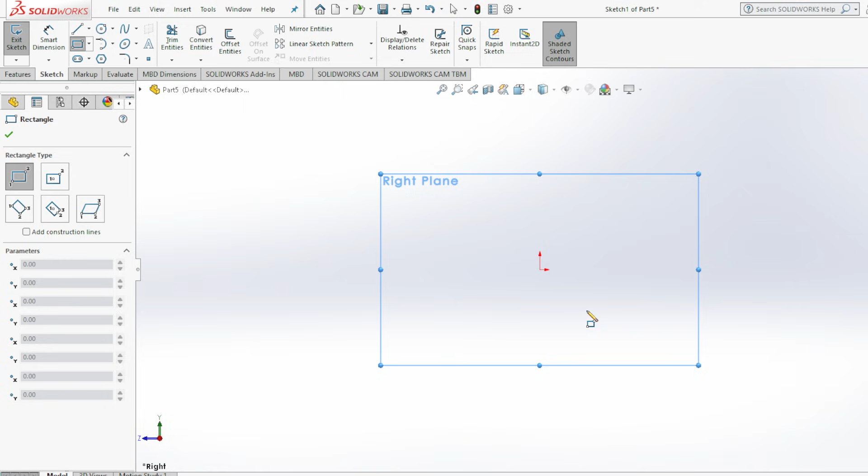Let's begin with the base. The shape of the base is visible in the right side view, which is the right plane, so we must begin this drawing there. Let's begin a new part, select right plane, select a rectangle, and draw a rectangle.

If you observe this, the size of the rectangle is 60 by 60. Go to smart dimension and make it 60 by 60.

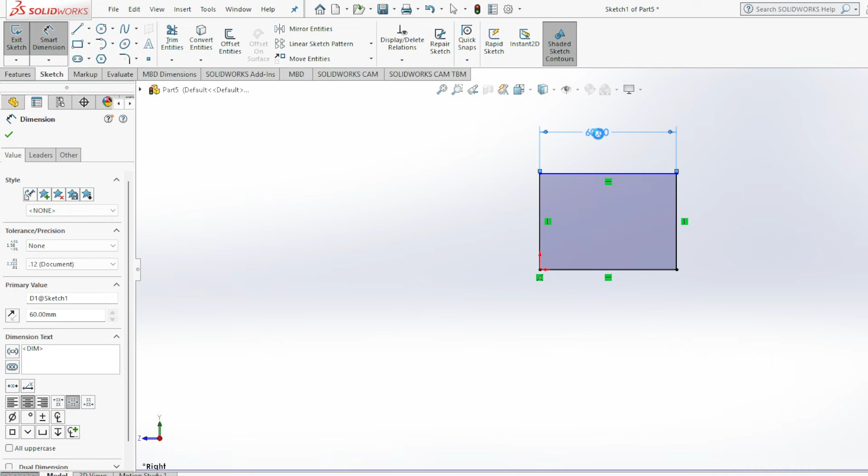Also we need two axes, horizontal and vertical. Go to center line, from the midpoint to the opposite midpoint, place a line, escape. Again select center line, from this midpoint to another midpoint, escape.

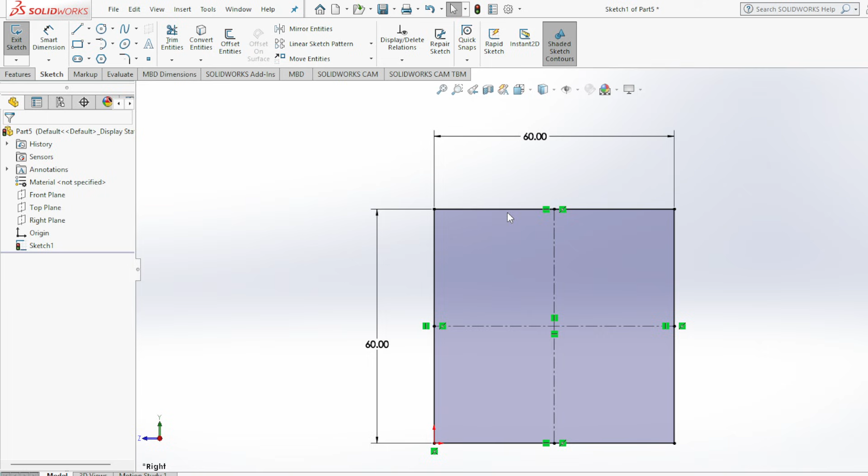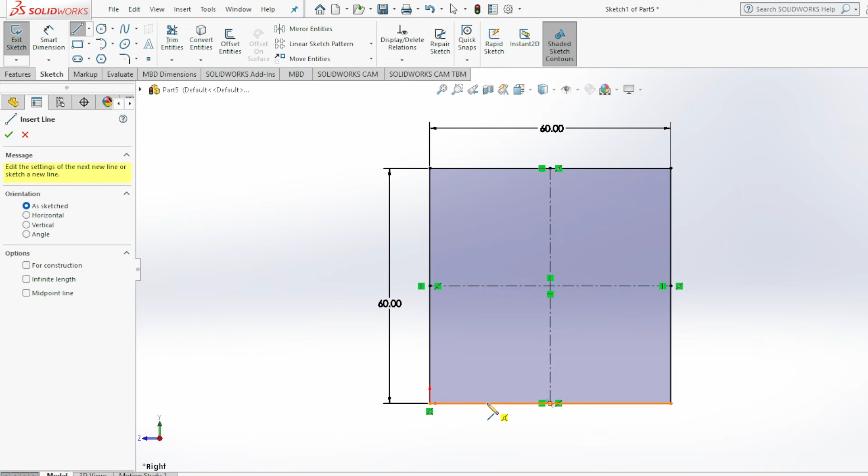Now we need this shape. The distance between this point and this point is 40, and the included angle here is 80 degrees. Select a line, draw an inclined line, then go horizontal, and again an inclined line, escape.

Now we don't need the area inside this shape. Go to trim entities, trim this portion, then OK.

The distance between these two points is 40 and the height is 20. Go to smart dimension, from this point to this point it is 40, and the height from this line to this line is 20.

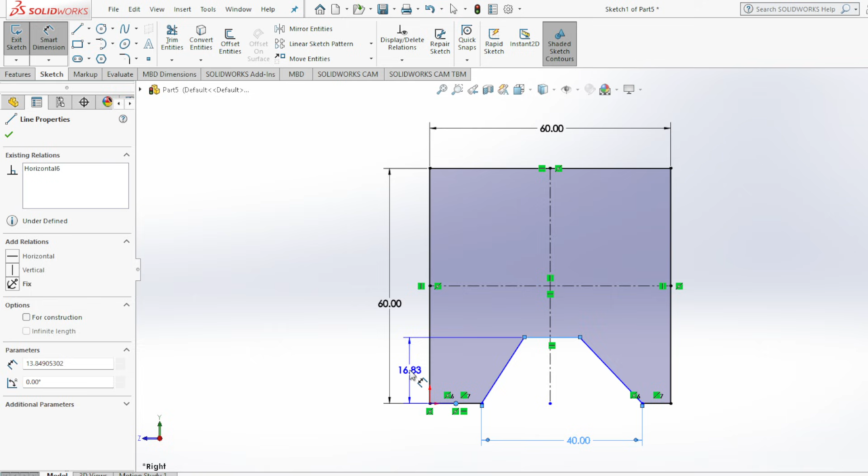Now we forgot the included angle. The included angle is 80. So click this line and this line and make this 80.

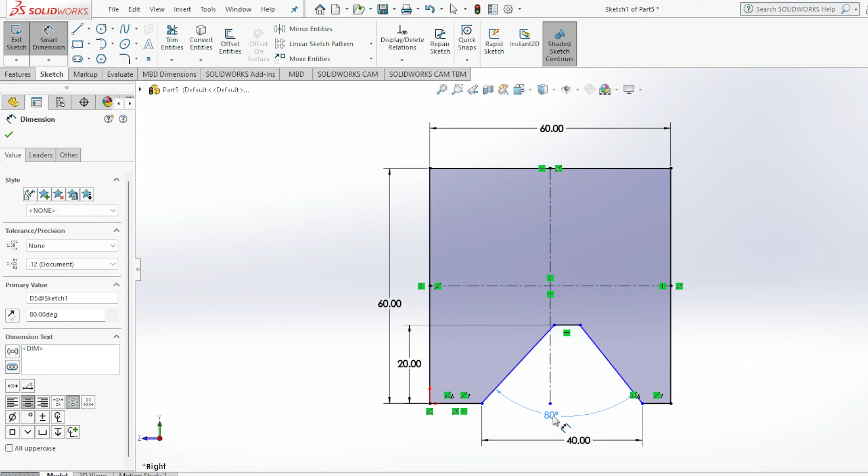If you observe this, the shape is distorted, so we must make this symmetric through the vertical axis. Simply hold control, click this line, click this axis, and also click this line. First, second, third. Hold control and select these three lines and make it symmetric. Then OK, so now it is fully defined.

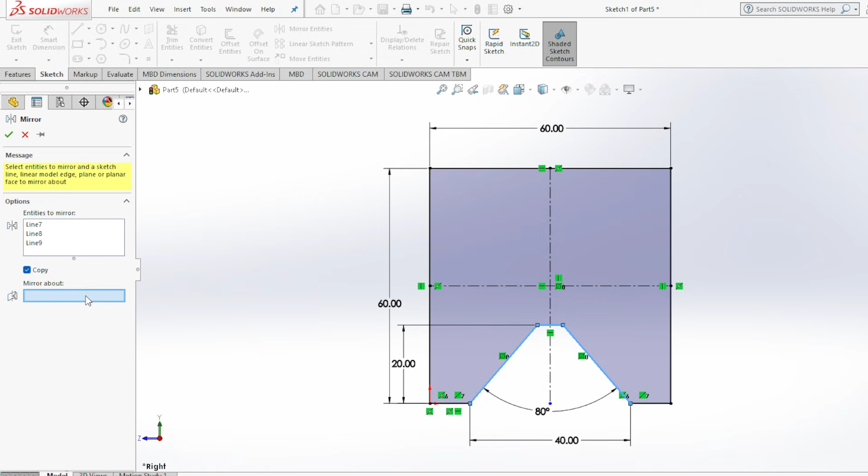Here we need to copy this shape, so we can mirror it. Select mirror entities. Entities to mirror: click this one, click the second and third. Mirror about: click here, select the horizontal axis, and you will see the shape here.

Then OK, so again we don't need this shape, so we will trim this. Go to trim entities, click here, and trim this portion.

Now we need these two rectangular slots. The size of the rectangle here is 6 by 12. Go back, select center rectangle, click here, and place the rectangle like this, then click OK.

Then we don't need the outer side, so go to trim entities, click this thing which is outside, then click OK. Now we need to give the dimension.

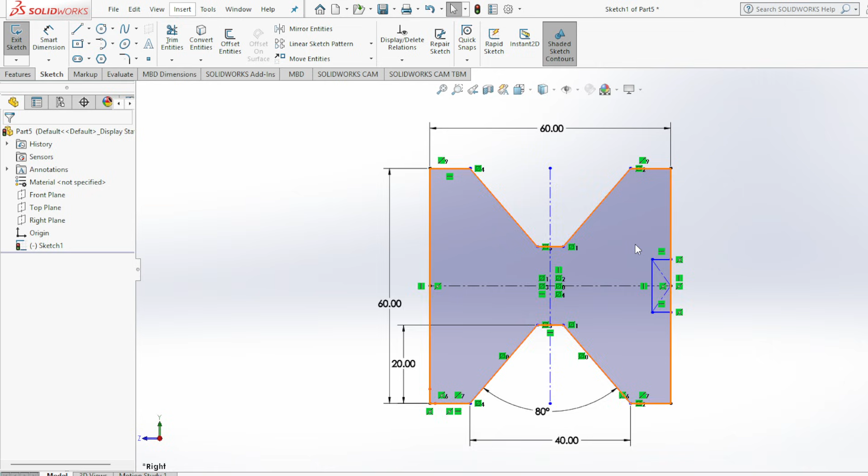The height is 12, so from the half we can give it as, from the horizontal axis we can give it as 6. Go to smart dimension, or simply you can give this as 12.

The depth here is 6, and the total height is 12, so from this horizontal axis till here it is 6, so that it will be centered. Then click OK.

We don't need this portion, so we will trim it. So delete this, delete this, delete this, also delete this.

Again we can trim this portion, we can mirror this portion. The same thing is here, so we can mirror it about the vertical axis.

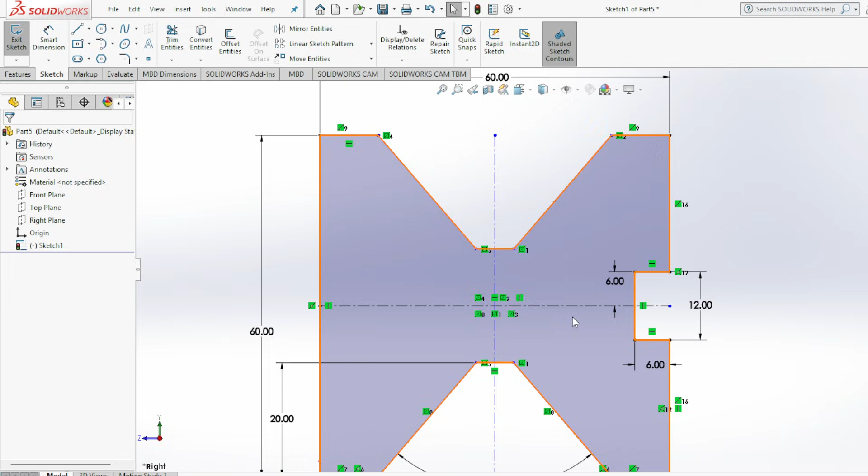Go to mirror entities, select the entities to mirror: second, third, these three lines we can mirror about the vertical axis. Click here and select the vertical axis, then click OK.

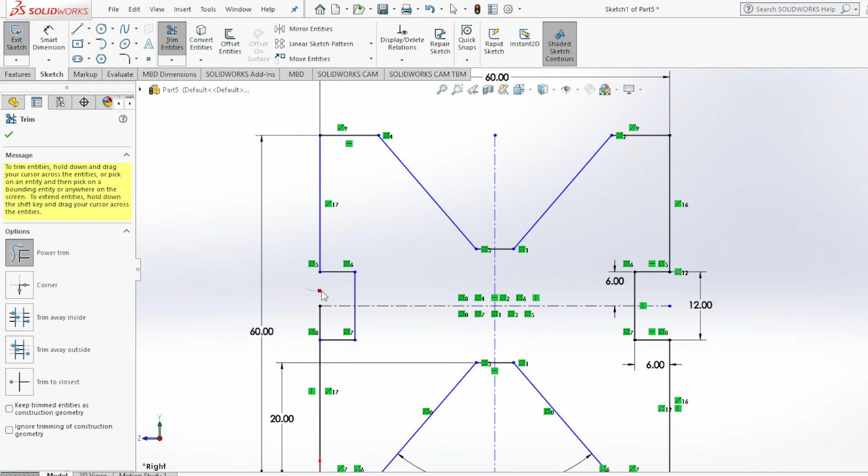Again we don't need this portion, we will trim it. Now the view is completed. We can extrude it using extruded boss base for a length of 100.

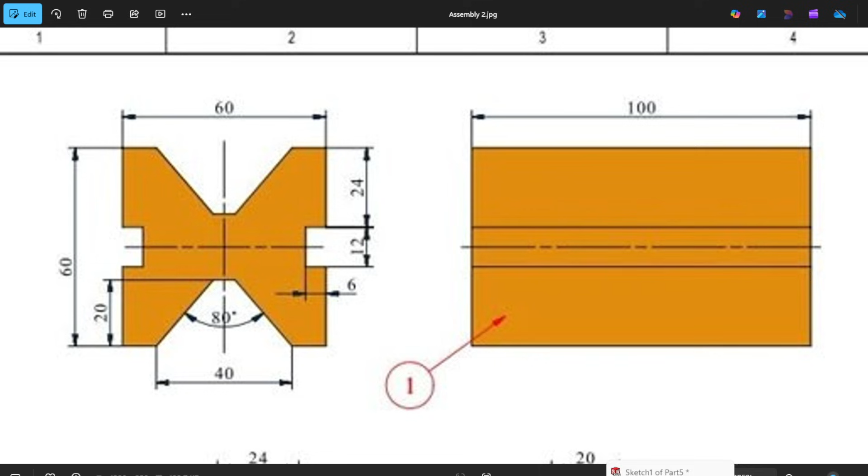Go back, so the figure is fully defined. Go to features, select extruded boss base, and give it a length of 100.

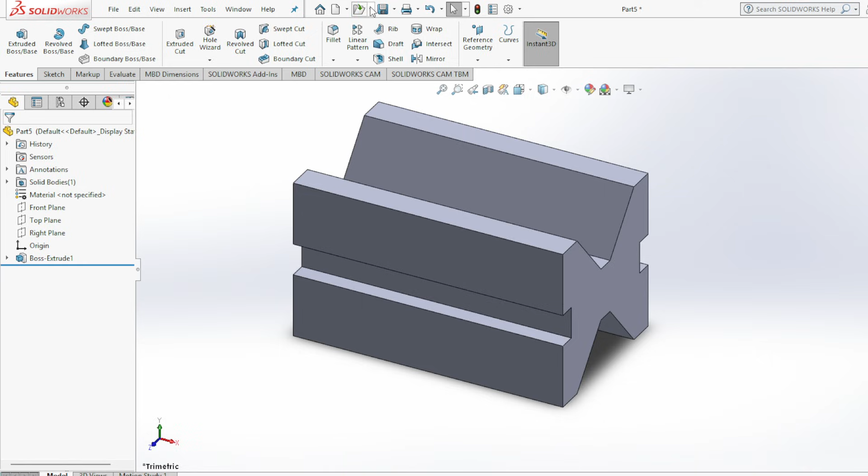So this is the first part, the base is ready. Save it as final PT, or part 1.

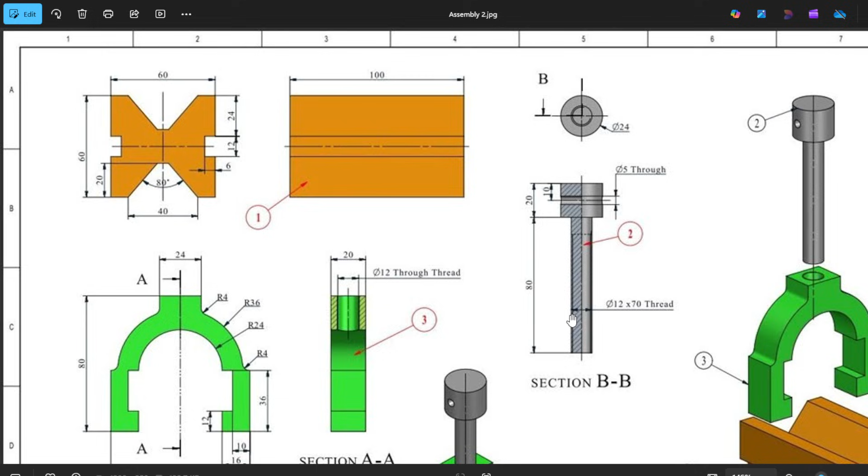Now we will go for the second part, which is the rod. The rod is visible in the top view, and basically it is a bolt, visible in top view. So we will select the top plane. The diameter here is 24, the lower diameter is 12. The height here is 20 and here the height is 80.

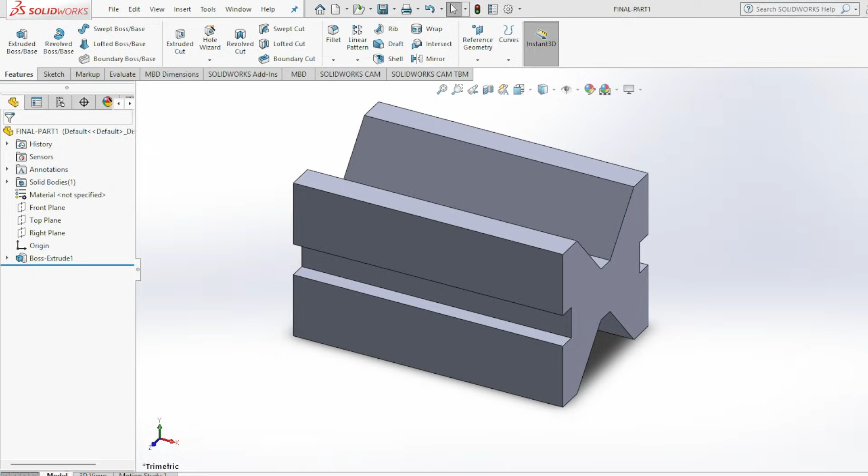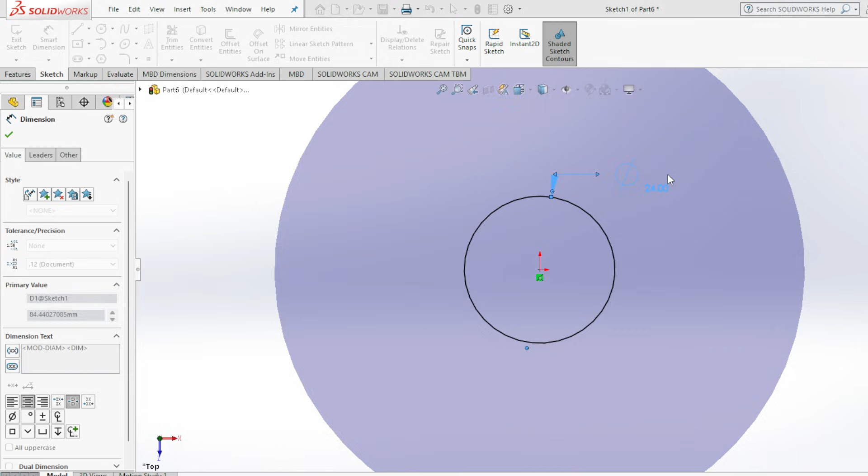So go back, close this window, open a new part, select top plane this time, go to sketch, select circle, draw a circle, click OK, go to smart dimension and the diameter here is 24. Then the height is 20. So go to features, extruded boss base, and give it a height of 20. Click OK.

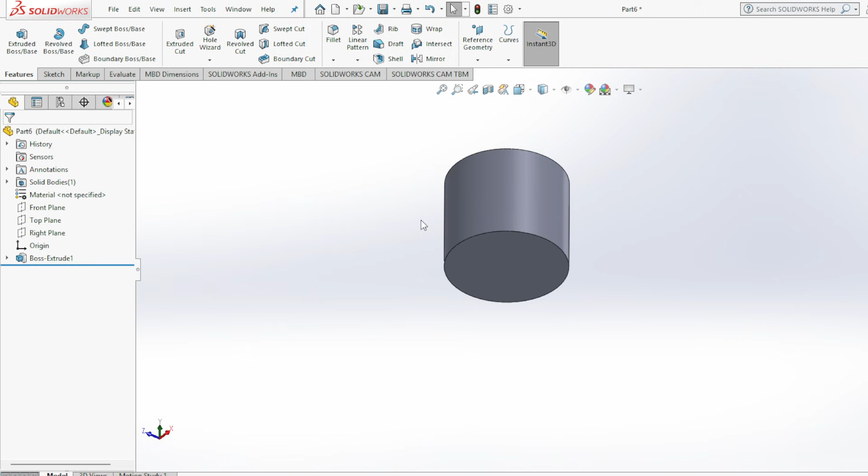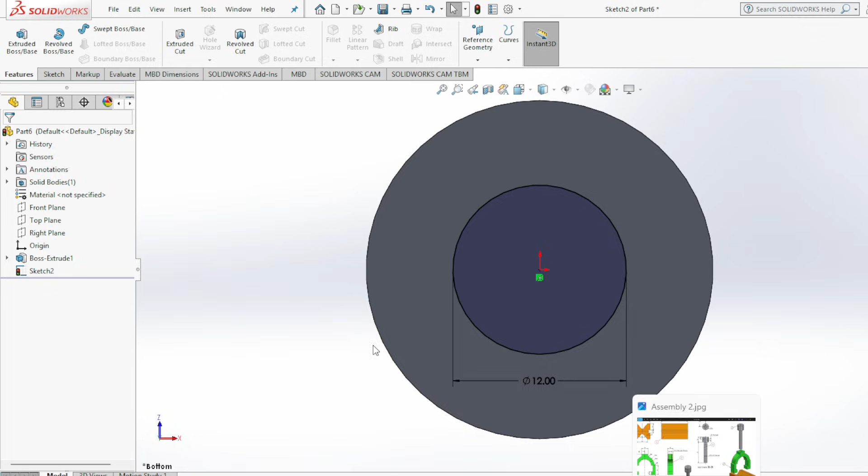Now we will draw this lower portion. The diameter is 12, so tilt it, select this plane, go normal to, go to sketch, select circle, draw a concentric circle from the same center as before, give it a diameter of 12. OK, go to features, this time the height will be 80. So go to extruded boss base, make this 80, enter, then OK. Now Control 7 to go back to isometric view.

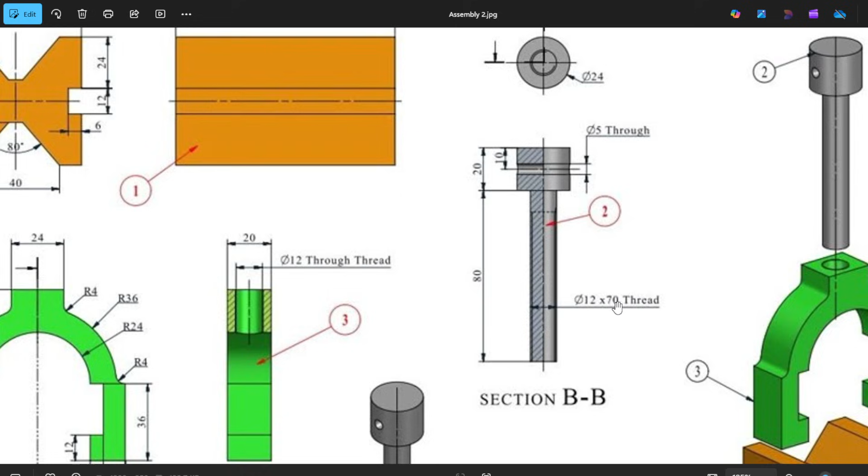Now here it is written as diameter 12 thread. So we must create a thread here for a height of 70. You can see there is an offset of 10, and the length of the thread is 70.

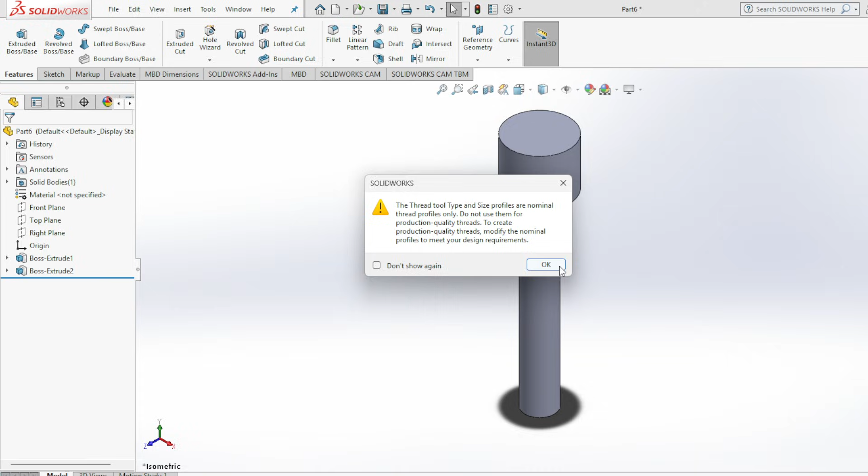Go back, go to hole wizard here. Select the thread option. Now here it is a metric die, M12 into 1.75. So for thread location, click the thread location and select the circle.

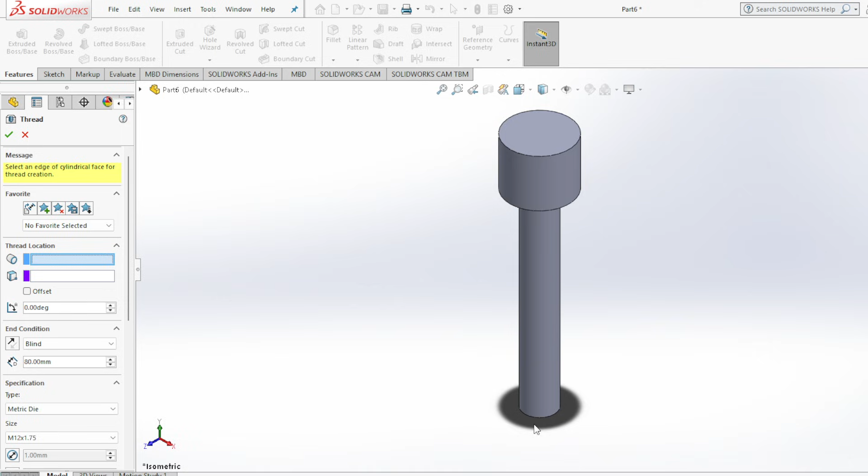Wait for some time so that the thread will appear. Now go for offset. We need the total length here is 80, but we need the thread for only 70, so here we need to create an offset of 10. We need the thread only for this portion, which is 70. So here it is written as 70 thread.

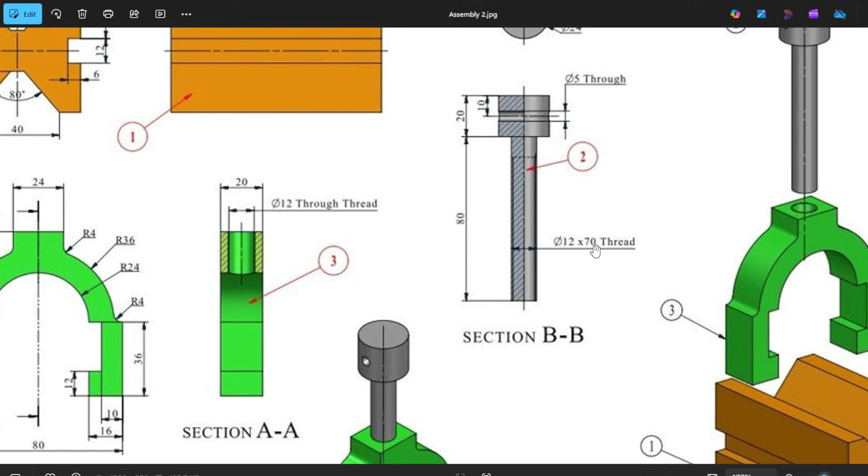Go back, select an offset, click offset and make it 10. The offset we are giving, the direction is upwards now. See, it is going upwards, but what we need is downwards. So we can change the direction of the offset. Here it is offset, we can change the direction. Click reverse direction, now it will go downside. See, now it is going downside. No problem if it is going outside of the bolt, simply click OK.

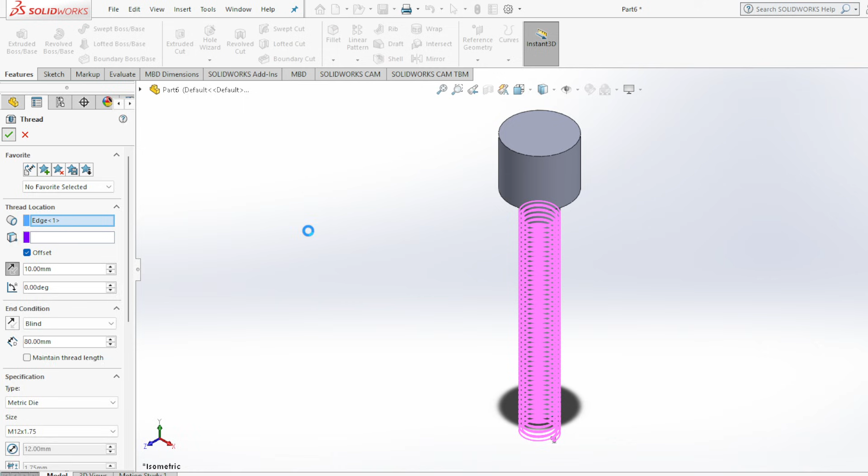So now the thread is applied on the part. Simply save it as final part 2. If the dialog is coming like this, rebuild and save the document.

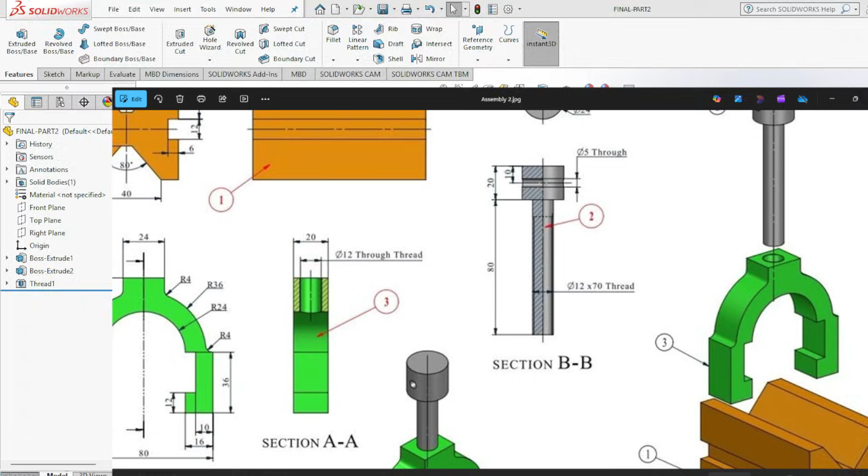Now 2 parts completed. The last part, which is a slider. Now first we must see in which plane it is visible. So this is visible in right plane again. So go back, close this part, open a new part, select right plane, go to sketch.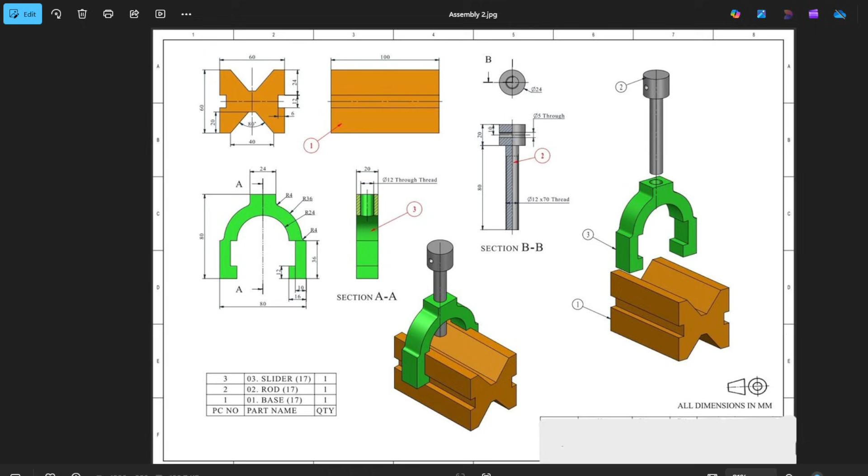Now here if you observe this part, there are 2 concentric circles and 1 axis. So these circles are of radius 24 and 36. So first we need to draw two circles. This 24 radius means diameter will be 48, 36 radius means diameter 72. So 48, 72.

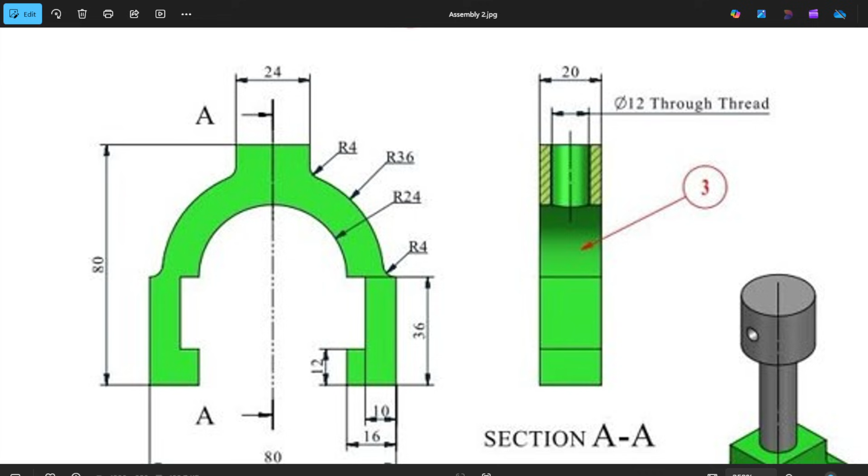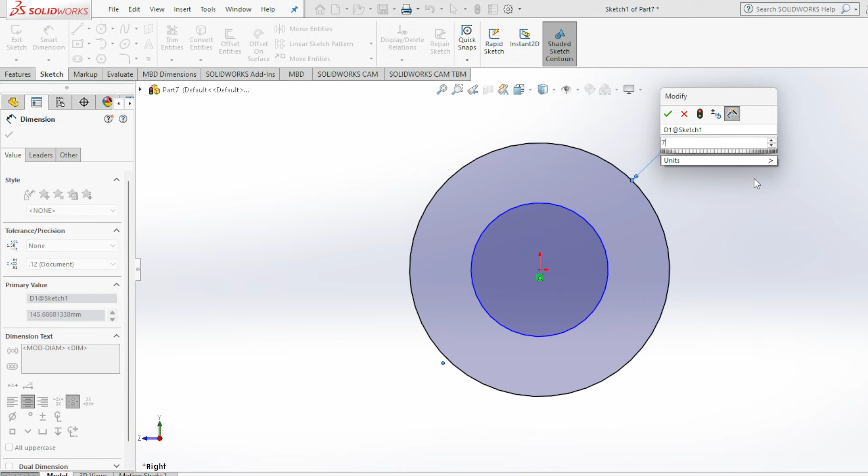So go back, select circle, right plane, OK. Select circle, draw two circles. Select OK. Now give the dimension 72 and this one 48. So radius 24 means 48, radius 36 means 72.

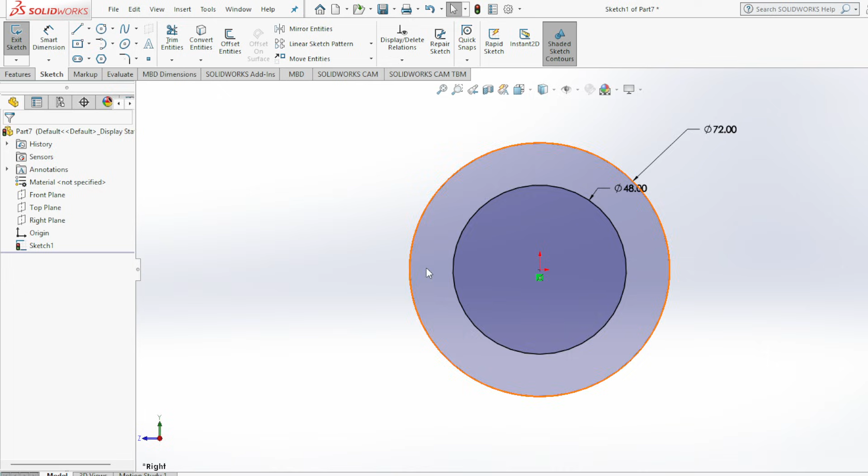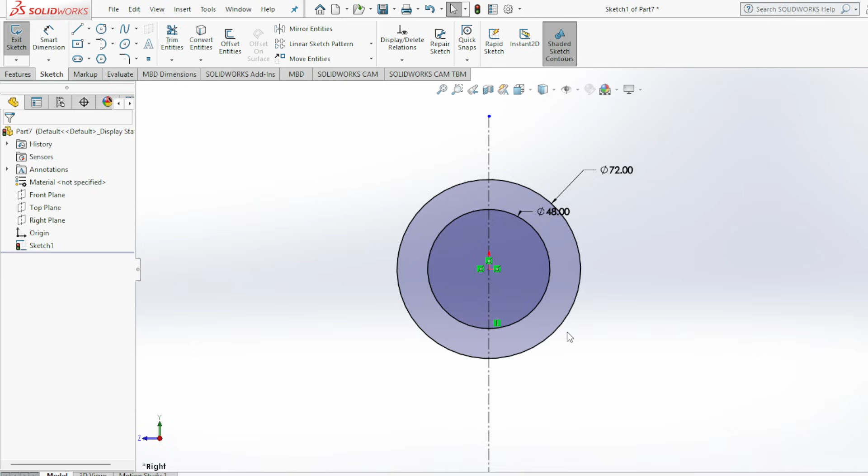Now we need an axis. So draw the axis, zoom out, select the center line, simply trace it upside so that one line will come. Click here and click downwards. So this is your axis. Now this is the vertical axis. Now we need to create a horizontal axis. So this is my horizontal axis. Escape.

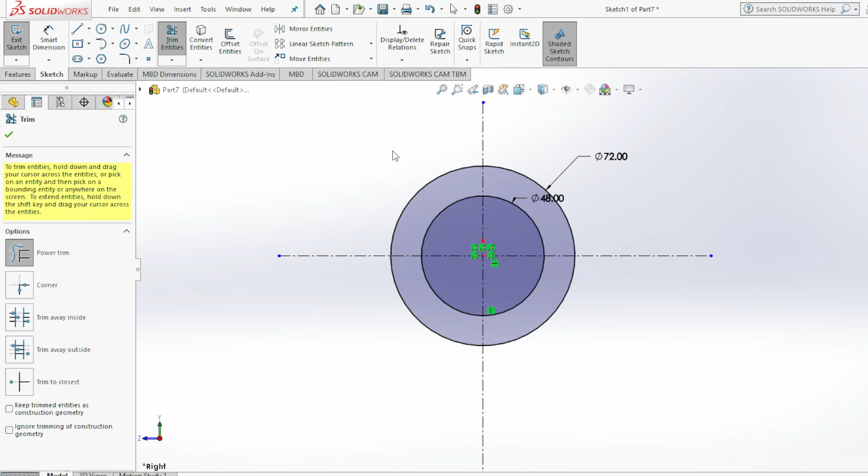Now we don't need this portion, so again we are going to use the mirror feature. We will only create this right side portion and mirror it about the vertical axis. So only we need the right side portion, only this one, then we will mirror it. So let's begin. All the other portions, these three quadrants, the second, the fourth and the third quadrants, we will delete. Go to trim entities, delete this and also delete this.

Zoom in. Now we will create the fillets later. So basically this is closing here, then going towards a slight right side for a length of 4, then going downwards 36, 16, 12 and 6, then going upside and closing like this.

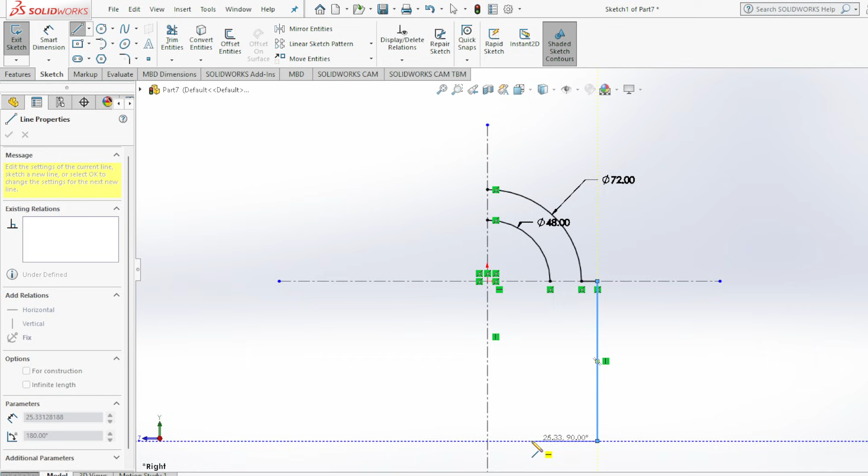Let's begin. Select a normal line. From here go a little right side, go downwards, go left side, again upwards, right side. Don't click here, okay. You should go a little beyond so that it will not fix here, or else the point will fix here and it cannot be changed later. So go right side, click here, go upside, click on this one, zoom in, close it.

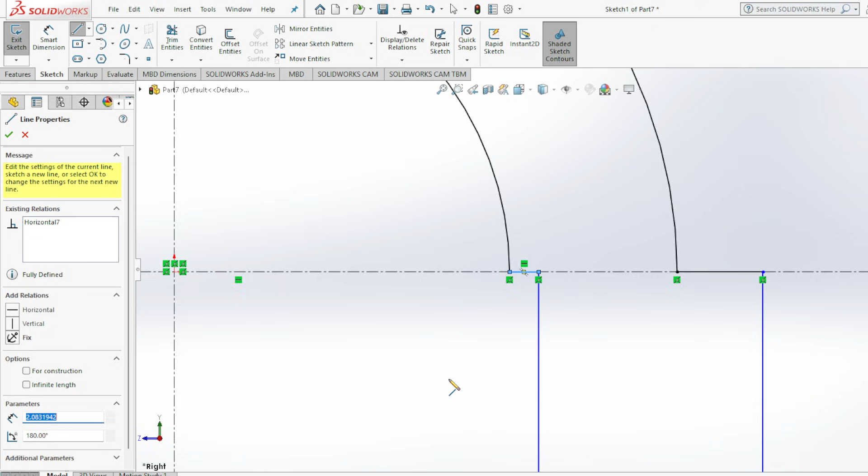Now we will go for the dimensions. Go to smart dimensions. This is 4, 36, 16. This is 4. This is 36. This is 16.

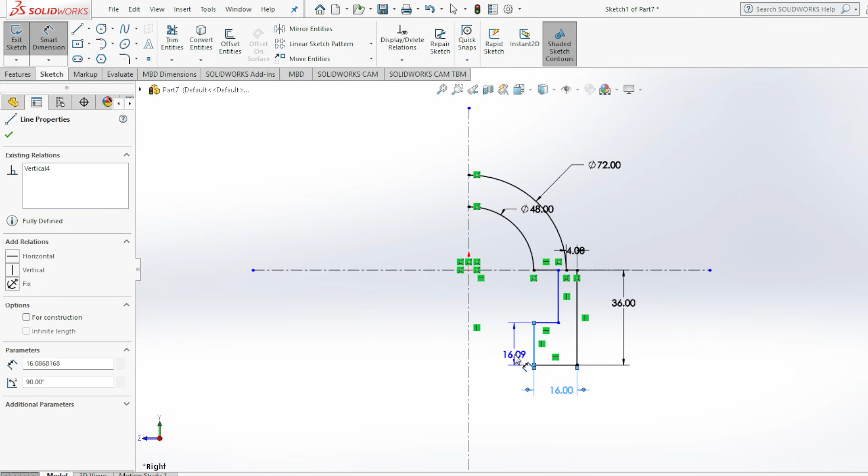And this is 12. 12. And this is 6. 16 minus 10 will be 6. Go back. So this distance is 6.

Okay, now our figure is fully defined and we have the half portion. So we will create the another half by mirroring, same like before.

I think we have missed one dimension, which is 80. This is not completed. We have only circle, so we need to create this portion. So for that, select the line from here, click, go upside, click, go right side, click, and connect this.

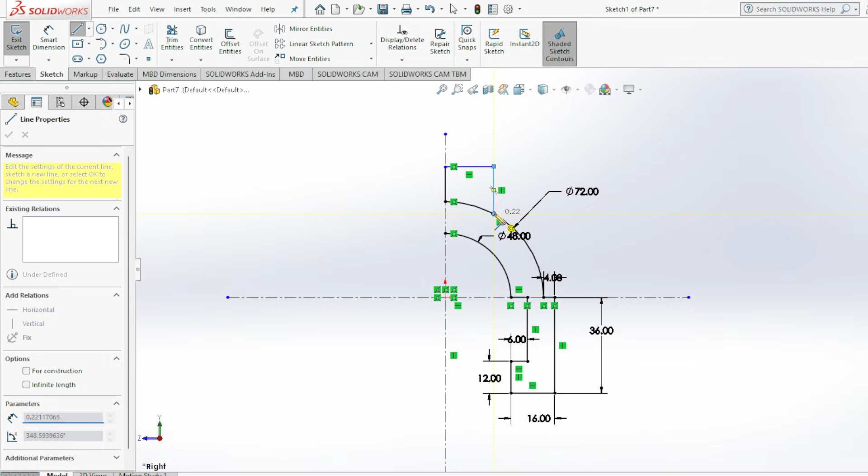Now we must apply the dimensions. If this is 24, the half will be 12. So go to smart dimension. This portion here is 12.

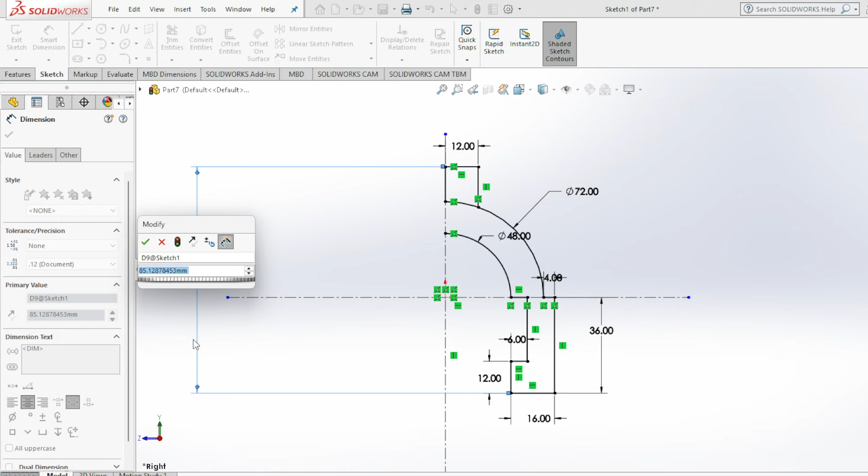The height from the base till this point is 80. So let's give this, go to smart dimension, select this line, select this line, it's not select, go to smart dimension, select this line, then select this line. The height here is 80, and we don't need this portion, so we will trim it. Go to trim entities, select this.

So now the figure is fully defined. We need to mirror this. Go to mirror entities, select the lines you need to mirror,

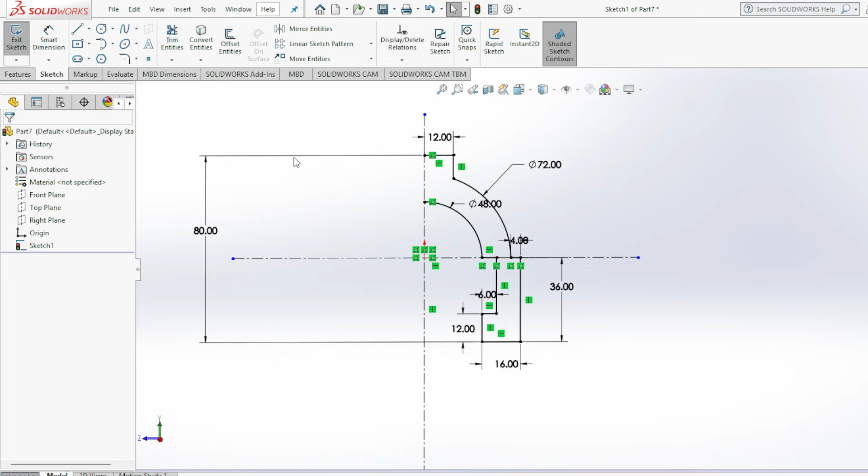Or simply to avoid this step, what we can do, delete this, close the line here. Now it will change the color to the shaded portion. Click OK.

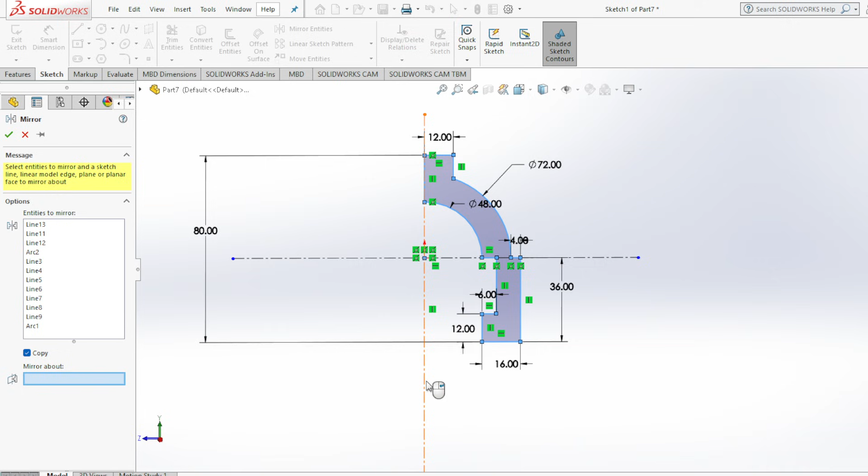So now we can mirror the entities easily. Go to the mirror entities, select entities to mirror, then click inside, click inside this part so that all the lines are selected. Then mirror about, select this axis, vertical axis, then click OK.

Now we have this part. So here we don't need this line, so go to trim entities, delete this line. Select OK.

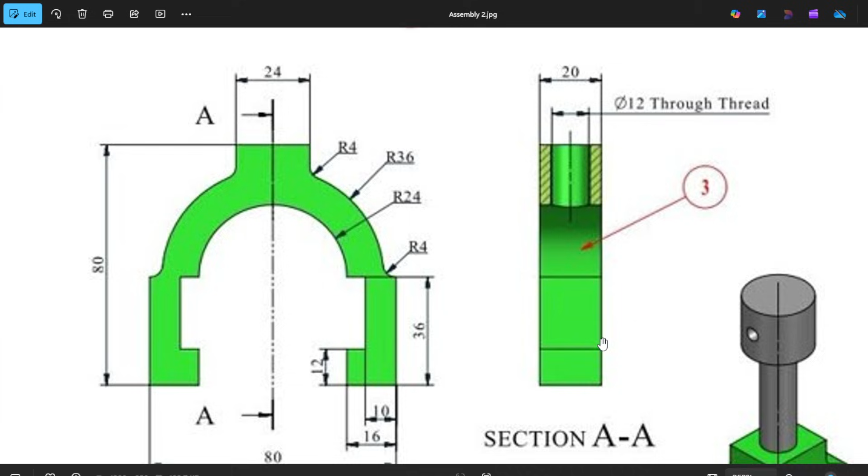So the thickness of this part is 20. Go back and go for the features, extruded boss base, give it a thickness 20, then click OK.

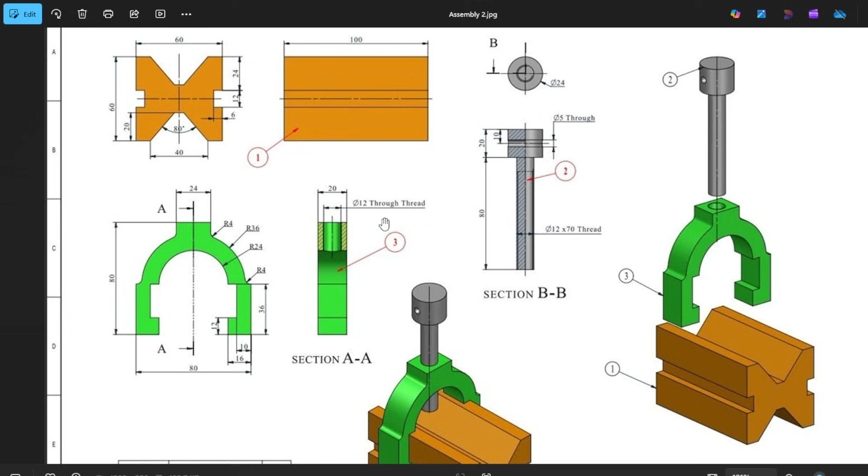So now what is remaining here? Here diameter 12, through thread, through all line. So we must create a thread of diameter 12 here. Click, select normal to, go to sketch, select a circle,

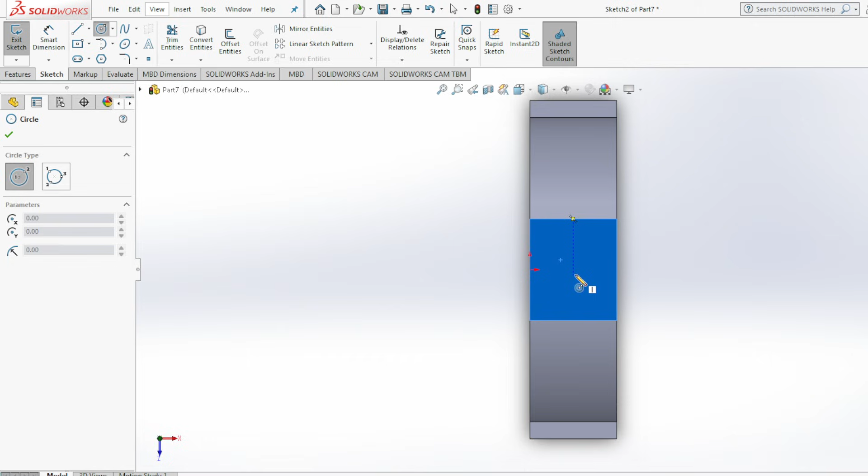From midpoint go to this midpoint and this midpoint, so you will get the center. From this midpoint downside and from this midpoint left side. So click here. Go to smart dimension, make it a diameter of 12.

Then go to features, extruded cut, then through all, then OK.

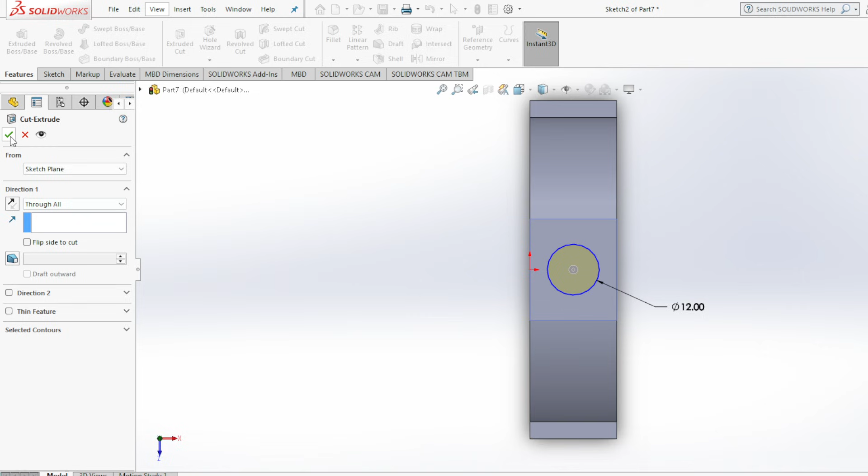Now Control 7 to go back to the isometric view. Go to hole wizard, thread, must select this extrude thread option. Here metric die M12, 1.75.

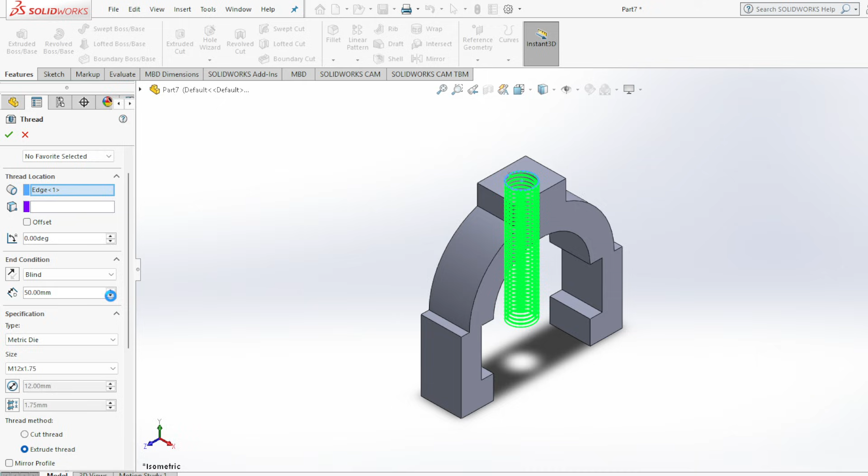So location will be... so if it is blind, just reduce it to 20. Then click OK.

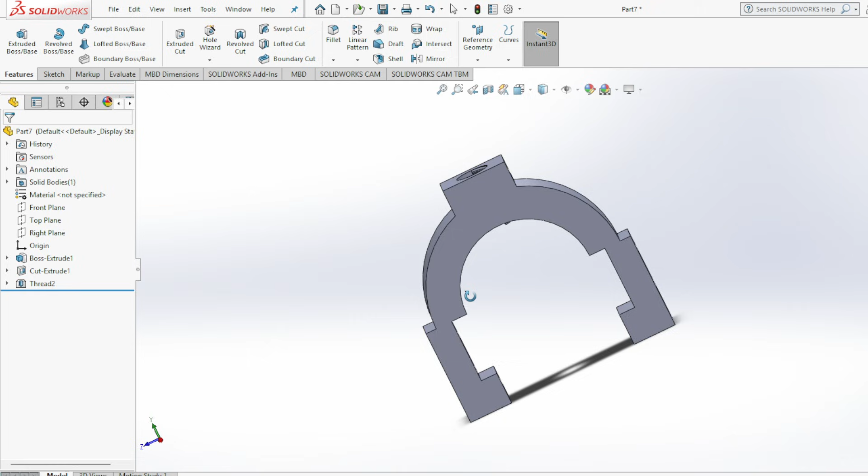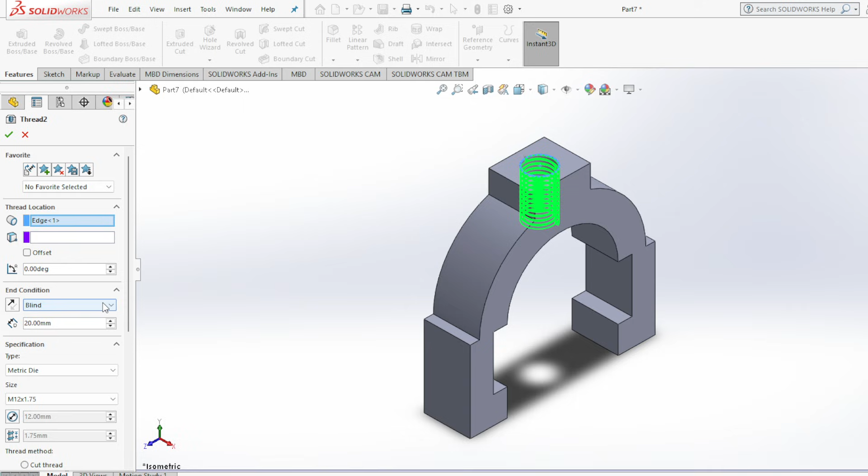Control 7. We must create an offset, I think. So go to offset, create an offset of 1 and change the direction.

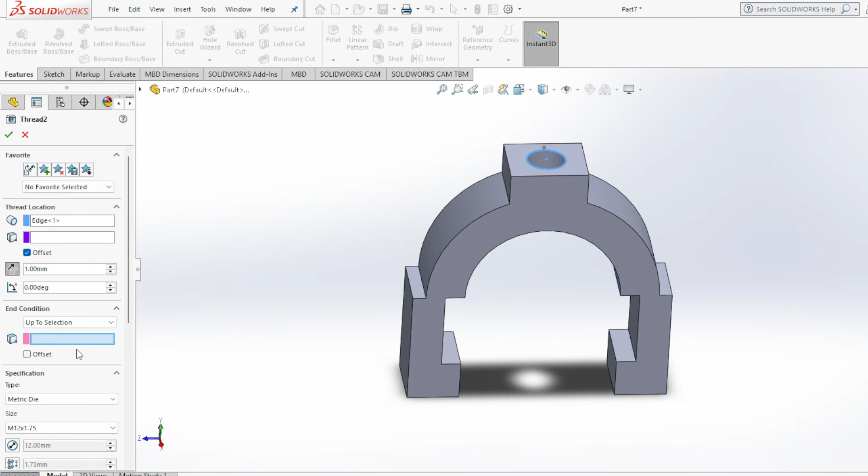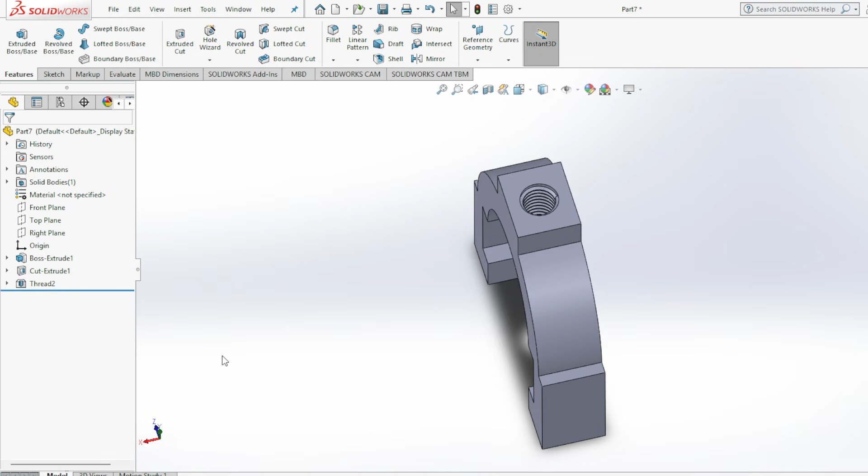Okay, it seems fine. So make it 0 offset. So now we have thread inside. Control 7. Save it as final part 3.

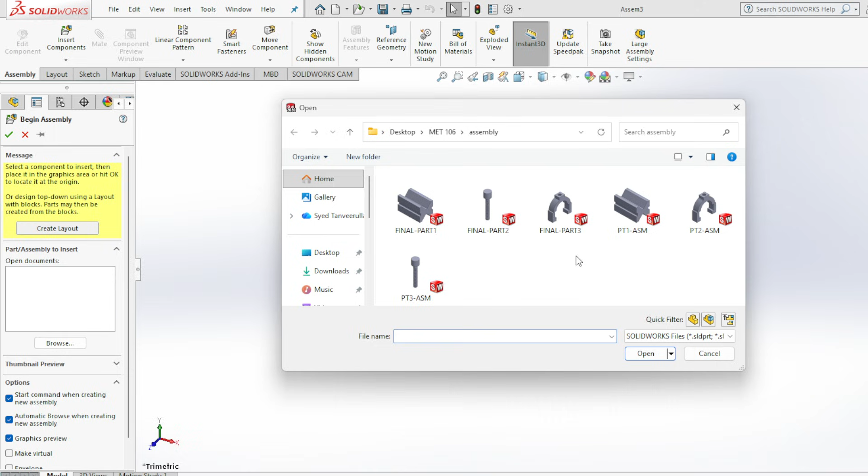Now we are ready to do the assembly. Just close it. Select new assembly and select the 3 parts. Open. Place the parts one by one.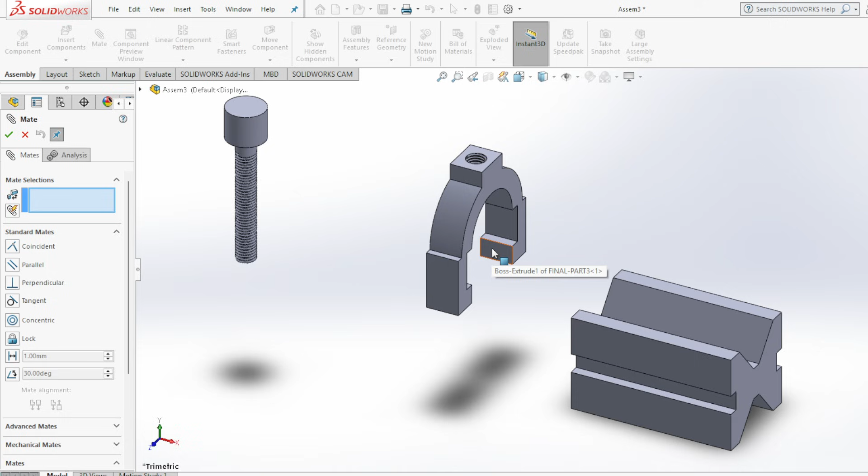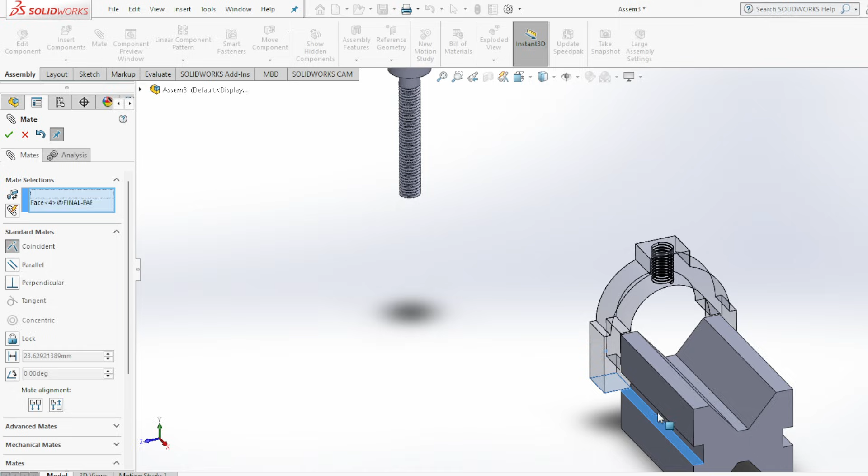Zoom in. Go to mate. So now this surface here, it will go here. Click here. Click there first, then click here, then OK. Now this surface will go here. Now we can simply move it over here.

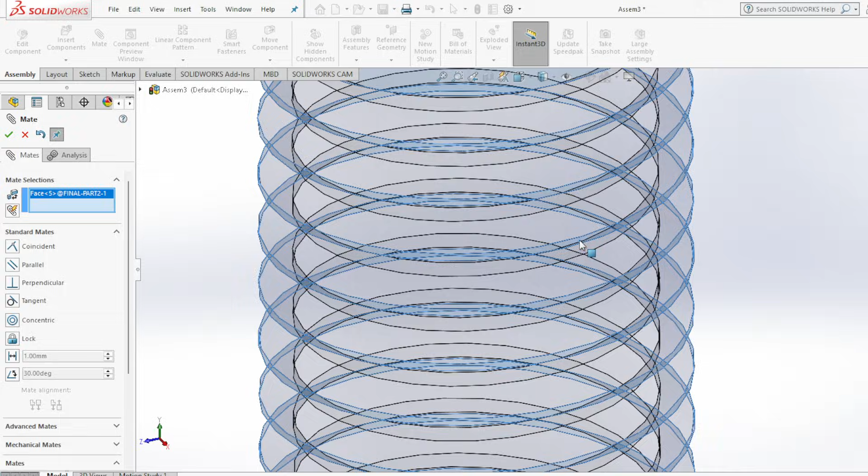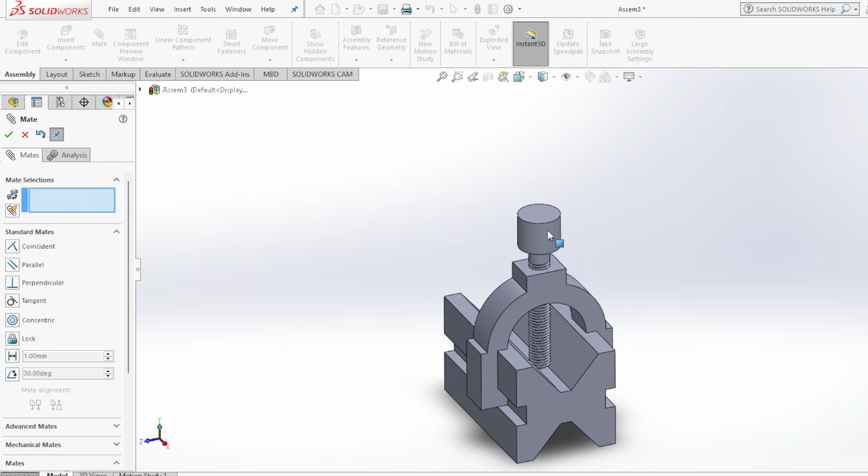So again zoom in the thread. We need to zoom in like this and select this portion and zoom out and select this portion inside. So it will come like this, then select OK. Now finally we did the mating, like this. So with this the assembly is completed.